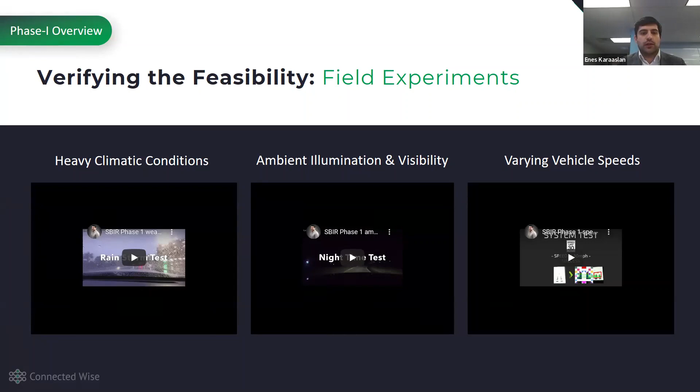To be able to create these messages, we also wanted to create an online tool that makes it easy. You prepare your message, you can even use the US DOT's message creator tool, which is very easy to use. After you create the message, you upload it to our online web-based tool, and it generates a signed message and a graphic for the agency to print the sign.

Are your signs dynamic or static? They are static, but we can implement a lot of dynamic information because we don't embed the message itself on the sign. We only use image features to match the message ID, which allows us to update the messages.

In the demonstration, we are doing a dynamic message update with a simulated work zone. We are changing the work zone configuration, and as soon as the vehicle enters the range of a roadside unit, maybe located at a central intersection, the system will pull all message updates in the vicinity. We'll do a couple of loops, so every time a different message will be implemented for a different roadway condition or work zone configuration.

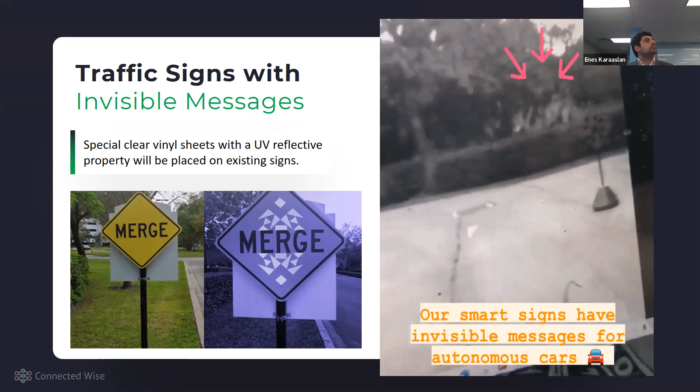Question: does the device incorporate this as well, the original device? Yes, so we simply hook up an external UV camera, since the preliminary research is still in phase 1. We'll need more R&D work to be able to make it ready for commercialization.

One of the biggest challenges, for example, is that car windshields are actually blocking the UV light, so it's not taking the UV light in. So if we were to put a UV camera in our device inside the vehicle, it wouldn't see anything. So we decided to make an external sensor, put outside the vehicle, that can still talk to the device inside the vehicle. That's our solution. For these applications, it's always better to put the sensors outside anyway.

Nighttime is also another challenge. As you all know, the main source of UV light is sunlight, so at nighttime there's no UV light. So we decided to test if an external UV flashlight or external LED UV light would be enough to capture this image, and we got very good results.

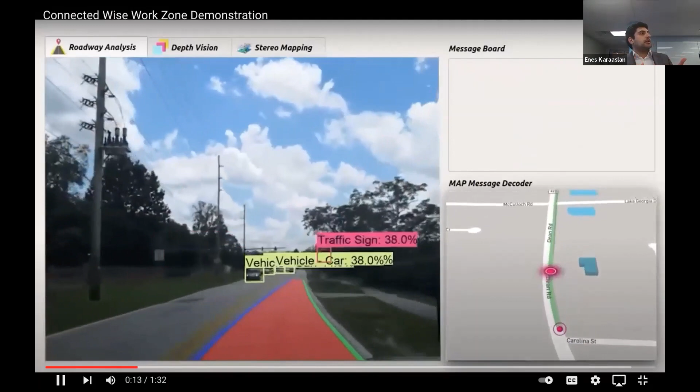Whereas you talked about the device itself, how much will a sign cost? So for this sign, it's not a special material, so you can use a sign vendor, like the signs that we brought here. We paid $100 for the highest quality aluminum sign.

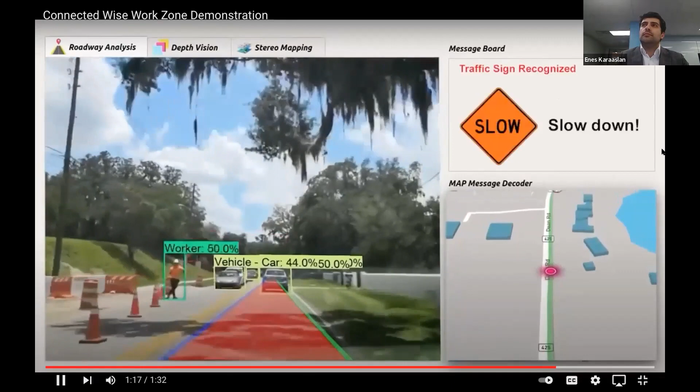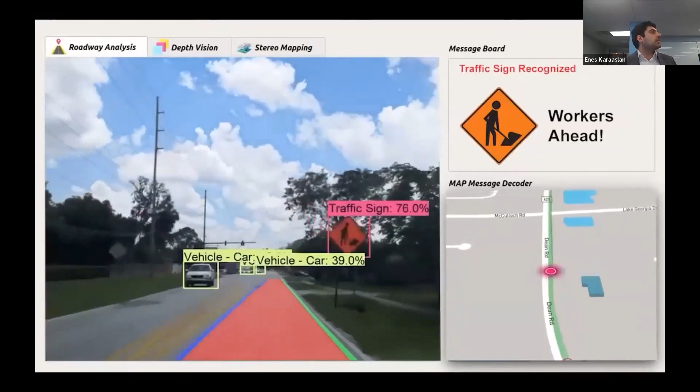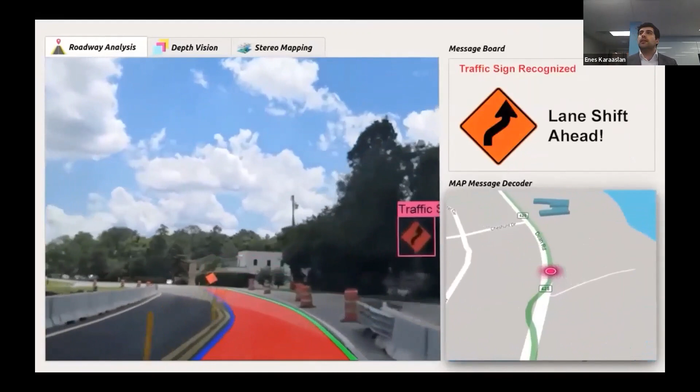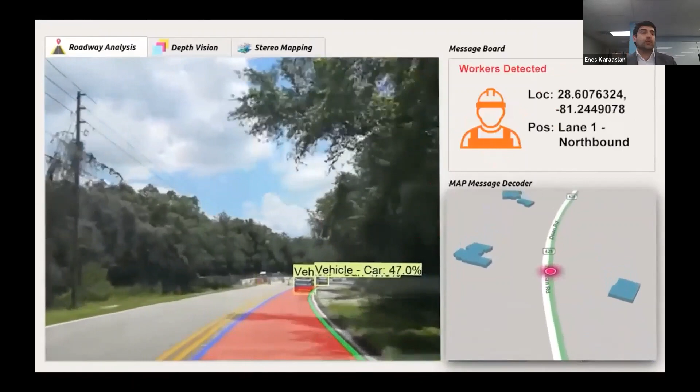All right, so here we place one of our smart signs. This is an automated vehicle demonstration we did in Orange County, Florida. Here there is a work zone, and we learned the road geometry information with the help of the sign. We are not using a lane detection model or anything, and in these configurations lane lines are not visible a lot of the times. There's a very challenging detour here, and our vehicle was able to navigate it very easily since we already projected the information coming from the road geometry data. We also added a lot of data collection here, so it collects data about the signage in the work zone, real-time position and heading of the workers in the area, and records this data for agencies to use.

So the vehicle you were using here was an autonomous vehicle? Yes, semi-automated driving. We also have a bigger brother of the device we made, with an added depth sensor that's able to do level 2 automation. For our commercialization goals, we decided to go with a non-automated, low-cost device since there's quite a bit of legal challenges selling an automated driving product to consumers or other customers.

Are you able to say who the autonomous vehicle belongs to? For fully autonomous driving, we collaborate with the University of South Florida. They have 2 fully equipped vehicles capable of doing level 4 autonomy, but our device will be able to do lane keeping and following a route, identifying roadway objects.

It's simply level 1 to level 2 automation, but as I'll show you during the demonstration, we have different versions of the product. This product has more sensors on it that allow us to do this automation too, not just in this particular demonstration. Which vehicle was that? This is our vehicle that we changed from a lease vehicle to semi-automated driving.

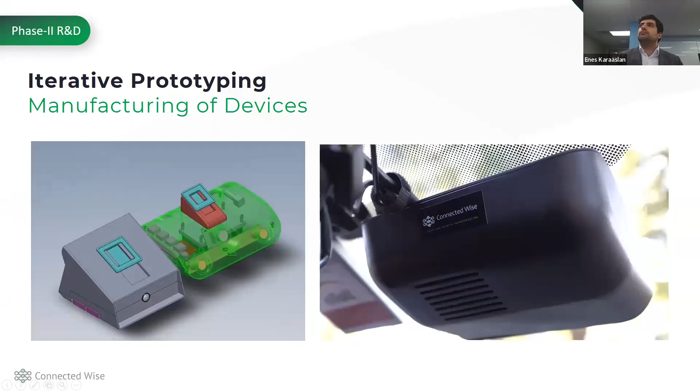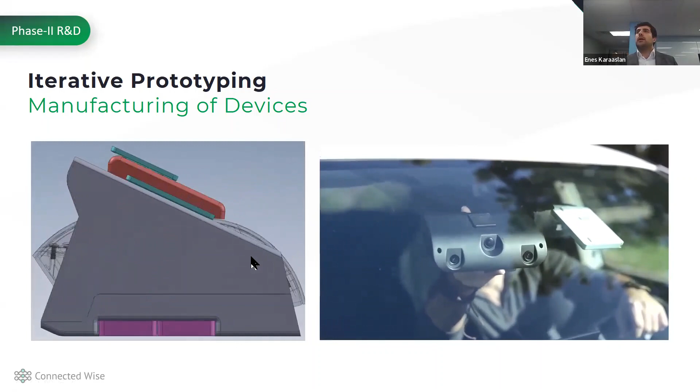So we've done a lot of prototyping work. We collaborated with a prototyping and manufacturing assistance company. They were also located in the same research park facility, so it was very easy to work with them. We've done a lot of different versions, so it's an iterative process.

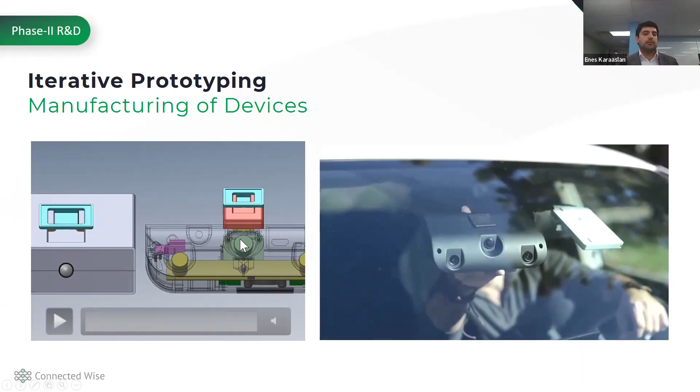From the initial design stage, we've done quite a bit of changes. This is actually one of the early ones that has a depth camera, another camera for data collection. This version can do some automation, but we also later made a more affordable version of the product that solely focused on driver safety rather than automation.

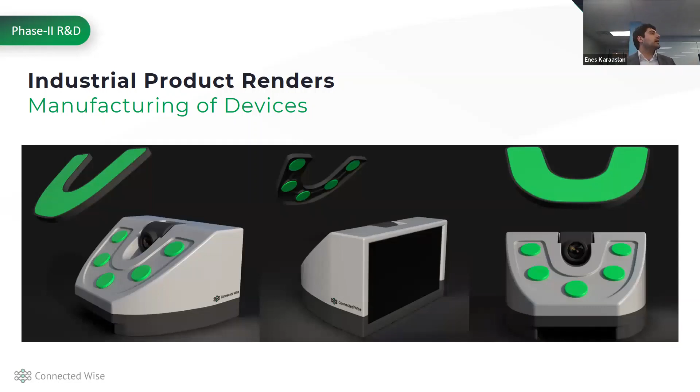So this is the latest product we've worked on. It has an embedded screen, a graphical interface that animates the detected roadway users, and all the safety warnings that we design.

Simply, all the ADAS and I2V messages and the safety warnings are kind of animated in the environment. We try to minimize driver distraction by finding the optimal position of this device on the windshield. We've done a little bit of research on that too.

We've done a lot of academic work as well, presented at so many conferences. We publish journal articles with Dr. Bani Hashemi and James Paul, and especially we were very active at the TRB and published 3 papers at the Transportation Research Record.

As I mentioned, we've done quite a bit of presentations at the ITS World Congress, TRB meetings. We got different patents for different portions of the work.

And recently, this collaboration with the University of South Florida led us to win a major award from the Department of Energy. In this work, we are actually targeting some continuation of this machine vision communication idea. We are going to be testing flashing sequences of headlights and taillights to send messages to the infrastructure. We have dynamic signs that change the message versus using our static signs here.

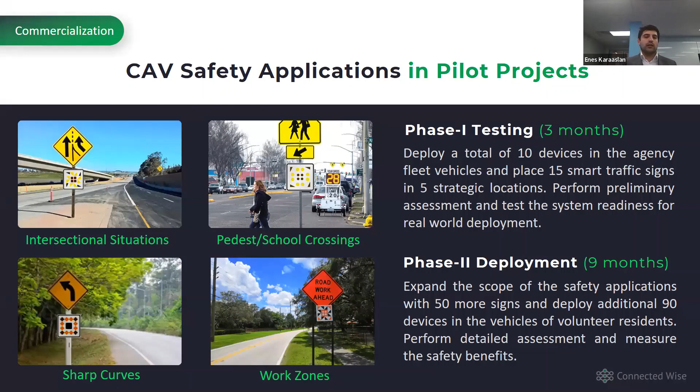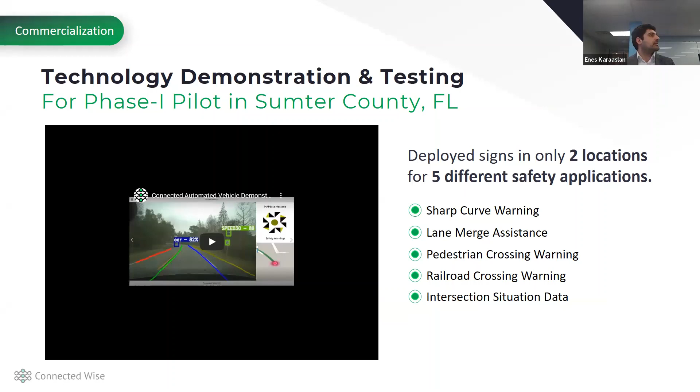So these are the phase 1 and phase 2 testing and deployment that I mentioned. We've done a lot of different sharp curves, intersectional situations, pedestrian school zone crossings, and work zones. They were ideal case scenarios for these applications. This was a phase 1 pilot in Sumter County, Florida, but we'll be demonstrating something very similar today, live broadcast to the audience on the Zoom call.

Our solution could help solve this problem. These invisible films can actually be a security patch on the sign, just like the security patch on a banknote. The camera system can verify this information against what the AI system is classifying, and if there's a mismatch of information, it will deactivate the adaptive cruise control or simply stop the vehicle, letting it make a safe stop in a traffic adversary situation.